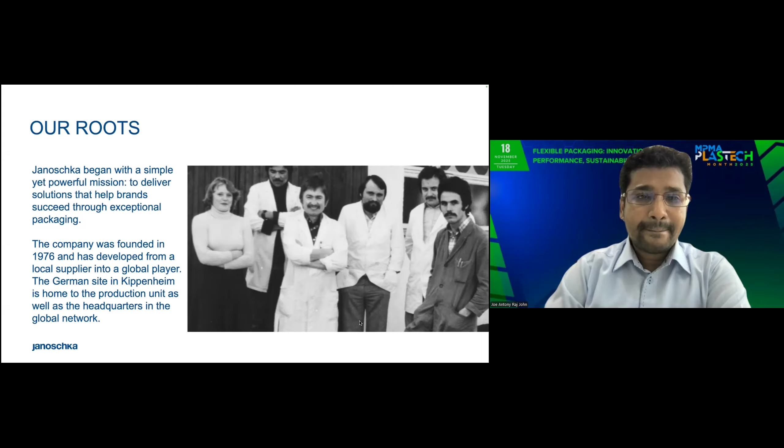We are the global partner of staff over 1,600 globally, with 21 sites in 12 countries. The complete value chain that we cover in Janoschka is from the design adaptation until preparing the cylinders and delivered to printers. So we produce, in the area of rotogravure, about 170K pieces, with embossing rollers of 2000, with a base of 30,000, together with flexo plates of 50,000 square meters.

With the excellence of over 50 years in the industry, with experience and innovations, we widely produce embossing rollers, rotary embossing microblinds, and also customized structure designs. This is also for food and non-food applications, especially in food industries like Maggi cups and butter cups. All these things have a relief printing, which we can produce the embossing rollers for them.

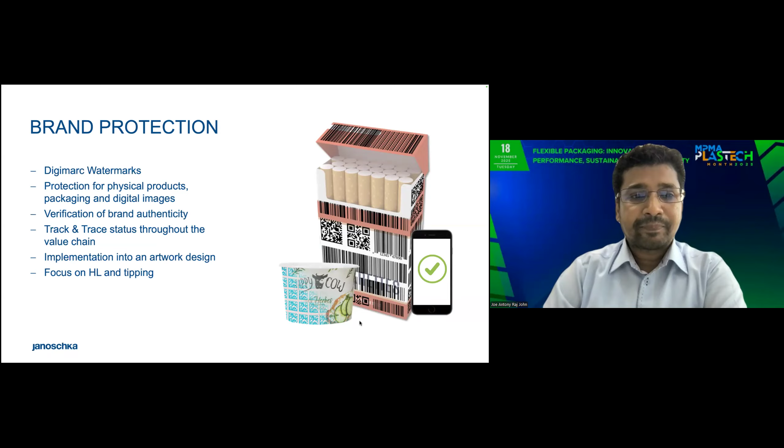For the surface finishing, we have a prismatic varnish coating, which has a dynamic interactive 2D impression, and also has an anti-counterfeiting feature. For brand protection, we have Digimarc watermarks, which can be scanned to know the brand authenticity using these softwares.

So here I'm going to talk about the Asia Pacific structures. Janoschka Malaysia, located in Nilai, is our headquarters for Asia. We also have branches in Vietnam and also in Philippines.

Our organization chart, we are reporting to Mr. Uday Kumar, the Managing Director, Plant Manager Gonzalo, and Willie Low, who's our Sales Director. Our business growth in manpower for 2024, we are about 150 staff with a revenue of 52.9 million Malaysian ringgits.

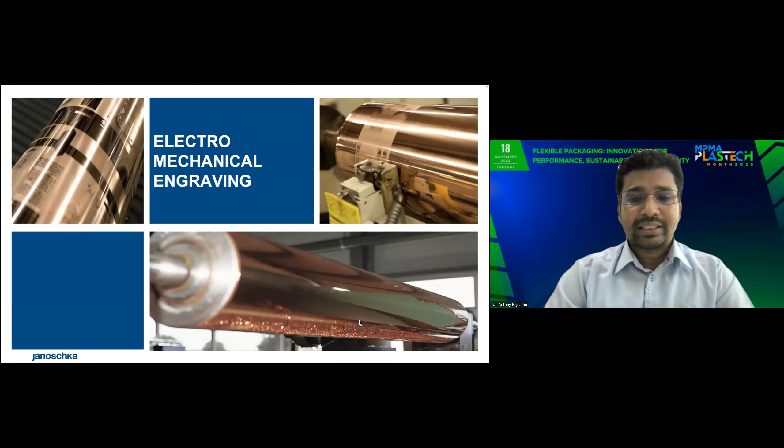So the coming slides will explain the engraving technologies in rotogravure. The first technology we are going to talk about is electromechanical engraving. It's a conventional type of engraving using a diamond stylus, which will have a variable in size and depth.

That's the engraving machine, electromechanical one, with the copper plated cylinder loaded on the machine. Using the engraving head, it will engrave on the cylinder's copper surface. The engraving speed is 8,000 cells per second using this diamond stylus.

As you can see, the variable depth can define the volume of the inks that it's going to carry. 5% tone looks smaller in cell size, whereas 50% cell is moderate size, whereas 100% will have a complete full volume in cell depth.

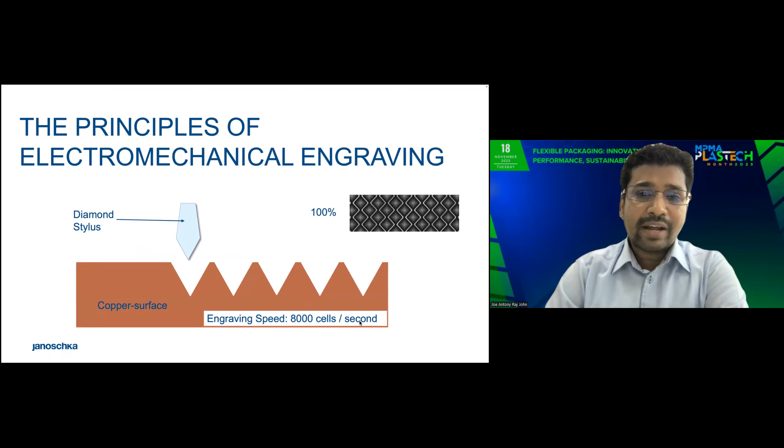Each and every diamond stylus and its angle has its own depths, which we can define by 120, 130, and 140. Most commonly used is the 120 stylus for all packaging in non-food and food industries.

For the cell geometry, as you can see, the cells are where the ink fills, and the cell wall is where the doctor blade holds and removes excess ink from cells, and the channel helps the ink flow smoother to print.

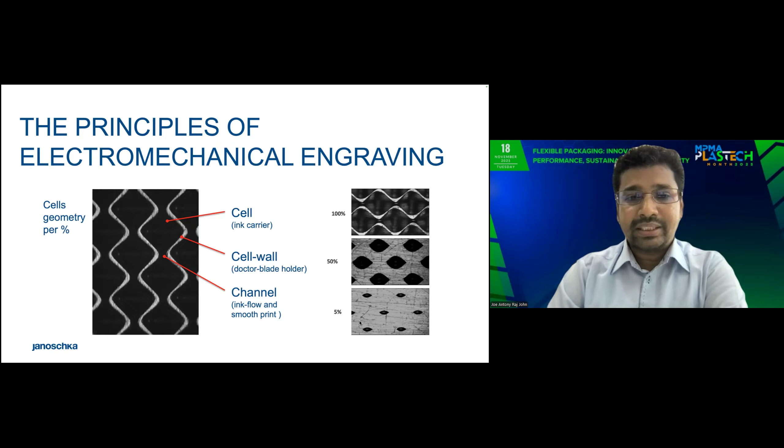As you can see, the 100, 50 and 5% of the cell dimensions look like this, and we have special tools to measure that and ensure these cells are produced repeatedly within the specific measurements and parameters.

There are certain line screens that we follow based on defined and fine screen requirements. The 70 screen is most commonly used, whereas 80 and 100 lines are very fine screens, especially for fine text.

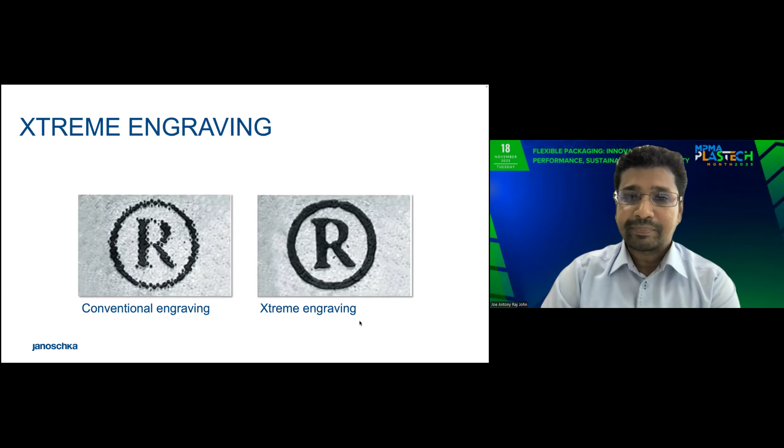Conventional engraving also comes with an additional plugin called Xtreme Engraving Head, which can reproduce very fine text elements. Aside from this, we also have high quality hinting, which can boost positive and negative text from the minimum to the max.

Adding to this, we have volume oriented engraving, which ensures that the volume and cell dimensions follow throughout the cylinders, to ensure perfect process control and to reduce waste during printing and color matching.

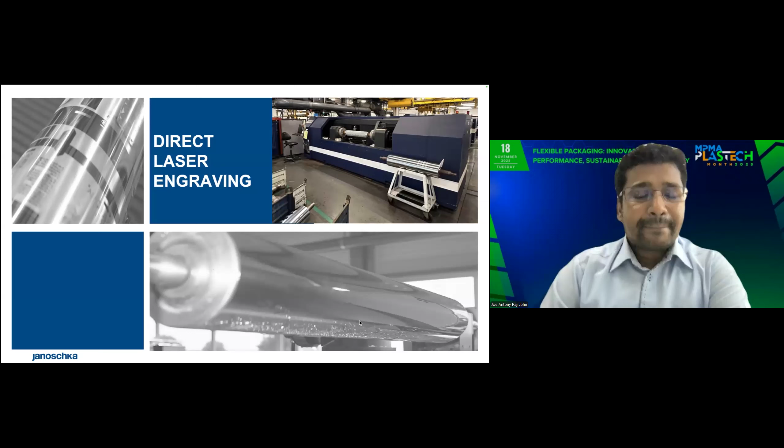The next technology we're talking about is direct laser engraving. This technology brings us variable shape, size, and depth.

As you can see, human hair is 100 microns, whereas our DLS master screen can engrave 35 microns, with a direct laser of 10 microns. With the exposition of ThinkLab, it can go down to 2 microns also.

So eventually the laser exposes on the zinc surface or copper surface, which engraves 70,000 cells per second, producing various shapes, depths, and sizes.

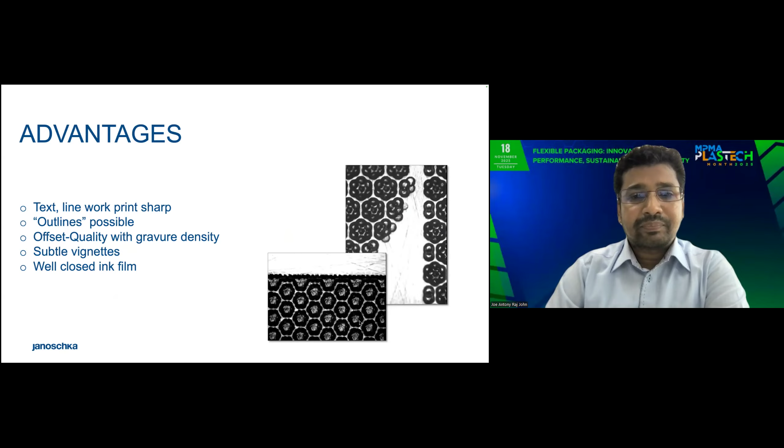There are various screens available by master screens and also single shot. This helps us achieve sharp outlines with offset quality combined with gravure densities, subtle vignettes, well closed ink films, variable cell geometry, variable depth, and extra large cell volumes. It's all possible with direct laser technology.

The last technology we talk about is laser etching. It's variable only in size.

This laser etching technology has special screens, outlines, and high resolution, especially for secure printing, text, logos, and sharpness. Manual cut and hand screen are still possible.

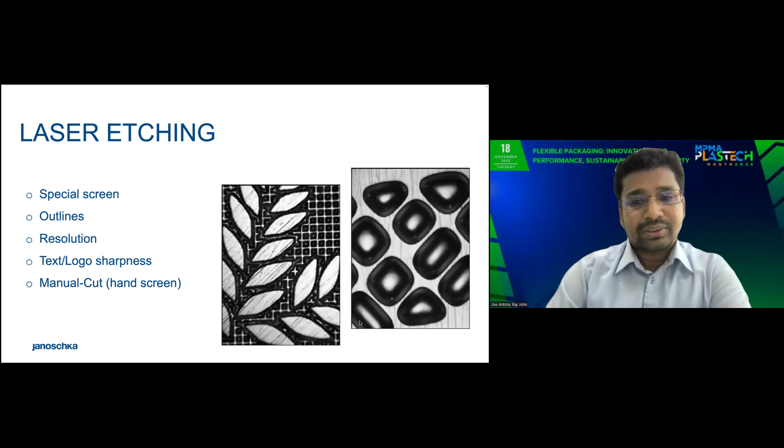So ideally this is for tipping papers and maximum 1 or 2 colors, especially for line work and fine logos and text for secure printing purposes.

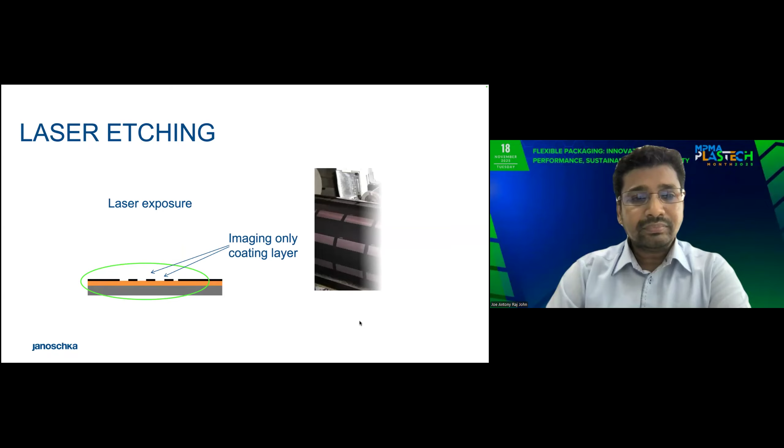The laser etching has its coating on top of the copper. The laser gets exposed on top of the coating. That's how the coating looks like. Then the chemical agents remove the exposed area and penetrate to the copper.

And to remove the etching resist. So that's how the cells look at the end, the final product of laser etching after the chemicals are done.

So the copper surface, all these 3 technologies require chrome finishing. This chrome finishing layer is up to 7 to 8 microns, but in industry we also do 12 to 14 microns as well. This is to protect the cell engraving, and also for resistance to the doctor blade and the ink substrates.

Dechrome, rechrome is still possible if you run certain meters; if the cell is in good condition, we can do dechrome, rechrome. Surface roughness varies depending on the substrate used.

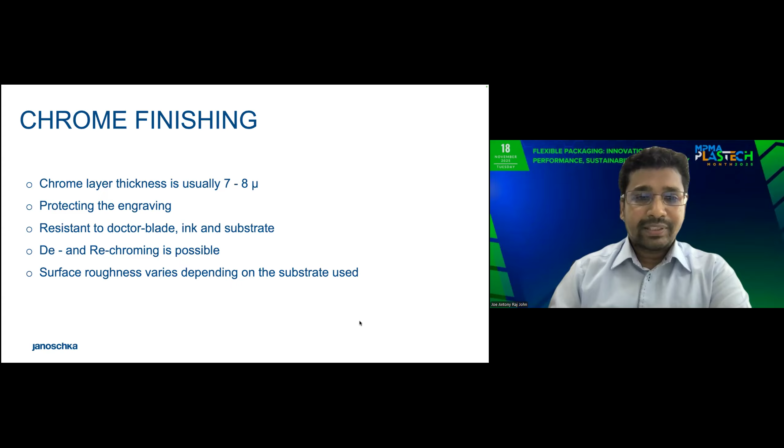To summarize, the choice of engraving technology depends on how complex the image or the artwork is. This is defined from the artworks we analyze. If there is fine text involved in the artwork, we allocate the technology to laser etching. If there are fine tones, fine vignettes involved, we allocate to direct laser or conventional engraving.

Customized surface roughness for various substrates available in the industry is also possible. And web compensation can be applied during the cylinder production itself. We do the final quality control to ensure that the cylinder engraving, the surface parameters and all the relevant information meet customers' requirements.

So this is all about Janoschka and what we do in various technologies. If you have any questions, please feel free to ask me. Thank you.

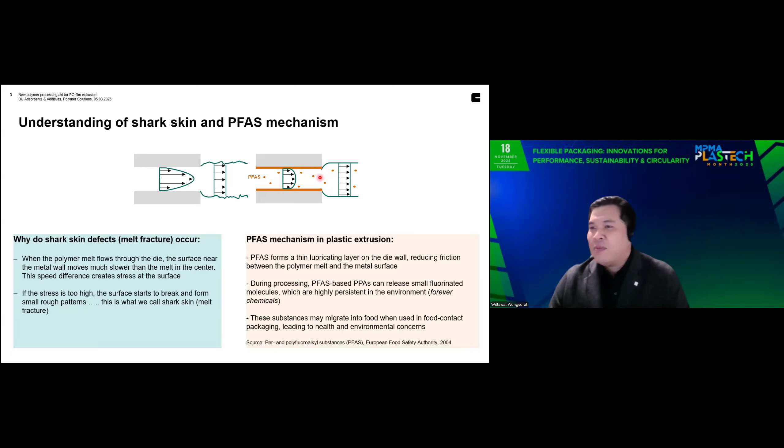However, we also know that PFAS substances can have a chance to contaminate the food, the film. And if the film has to contact the food, it can possibly migrate to the food. And if we consume the food, there is also the risk of PFAS contamination in our body. So more and more regulatory bodies push more restrictions on using PFAS in food contact packaging.

You can see here, I summarize some key regulatory points. In December last year, the European Chemicals Agency announced that they are under review to restrict the use of PFAS in food contact packaging. In the US, 13 states have already banned PFAS in food contact packaging. And in November last year, they announced that there are 15 states going to consider banning PFAS soon.

From the European side, in the regulation on packaging and packaging waste, you can see here they already announced that they will start to limit the PFAS allowed to be detected in food contact film to only 50 ppm, and it will start August next year. So from the regulatory point of view, there is more and more concern about using PFAS in food contact packaging.

And moreover, we also know that 3M, a major producer of PFAS in the market, already announced that at the end of this year they will exit the market. The reason is that they found PFAS contamination in the blood of people living near the factory.

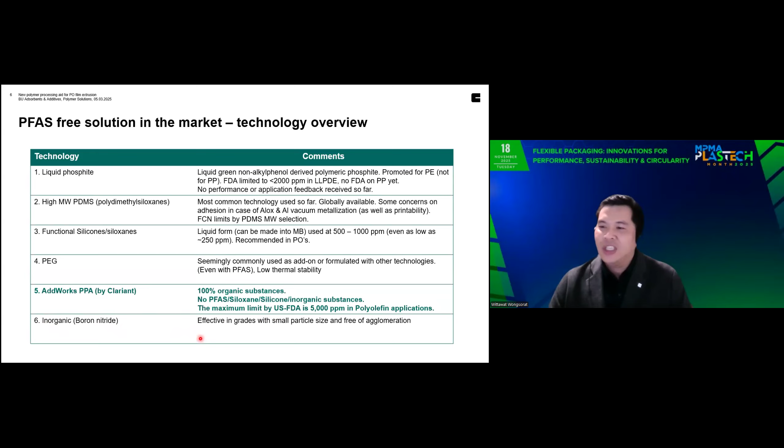So from the challenges that we have, we take the challenge from the regulatory point of view to develop a product which is safe for humans and the environment. For the processor or converter side, we also take the challenge that line production efficiency has to stay the same, with no drop in efficiency. The end customer should get the same quality of film performance compared to the PFAS polymer processing aid.

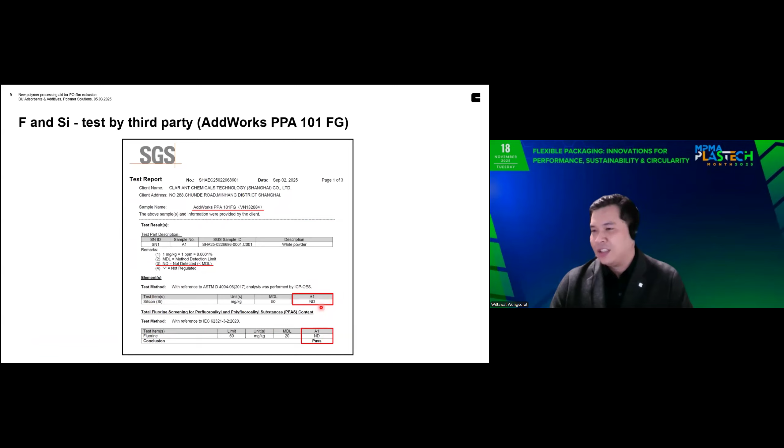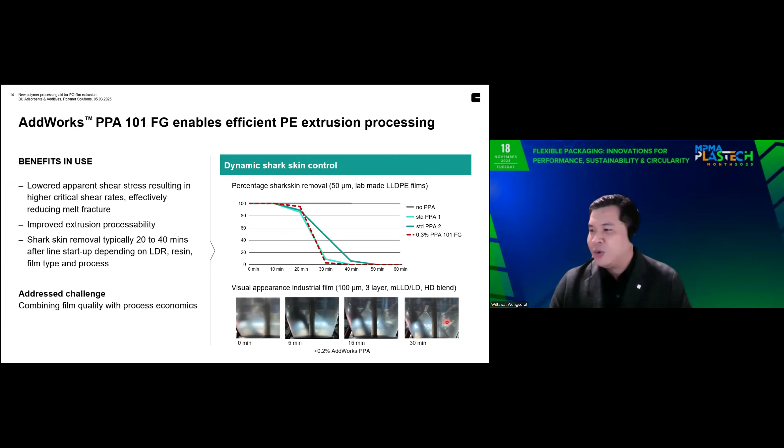In terms of the die build-up, you can see here we conducted the die build-up test using the metallocene LLDPE resin. After we run from 1 hour until 6 hours, the die build-up is there. You can see the black substance at the die. When we compare with the standard PFAS at 500 ppm, you can see the improvement in terms of the die build-up.

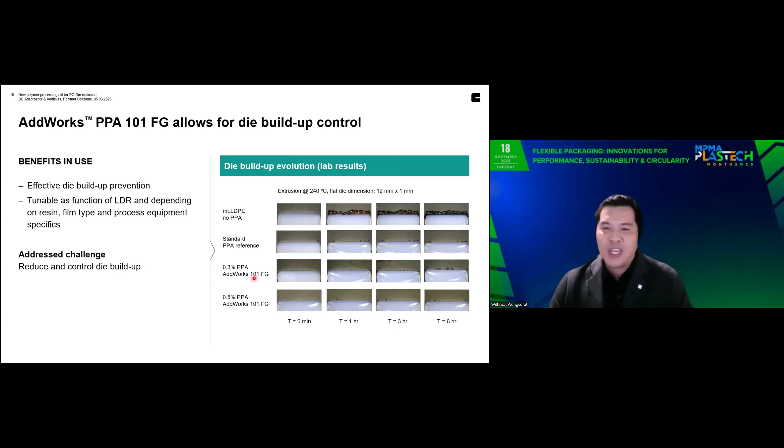Like I mentioned in the beginning, if you would like to get the same performance as 500 ppm of the PFAS PPA, you have to start with 3000 ppm of our products. You can see here the performance looks similar. But if you would like to get better performance compared to the PFAS, you can add 5000 ppm and you will get better performance. You can notice that we use more dosage compared to the PFAS. But when you calculate the cost per use, it will be similar or the same compared to the PFAS solution.

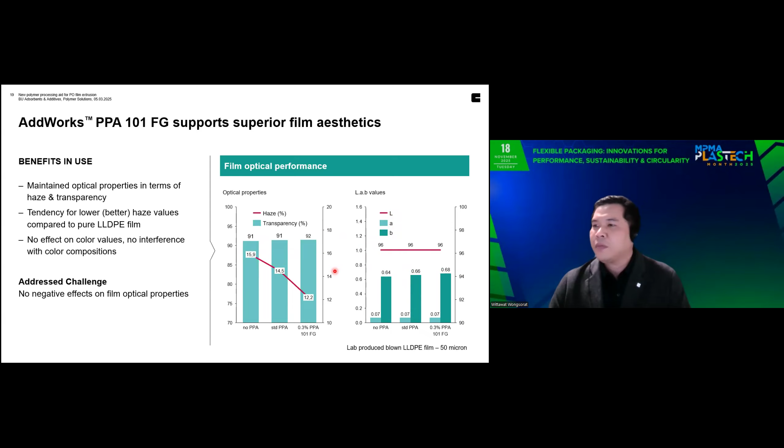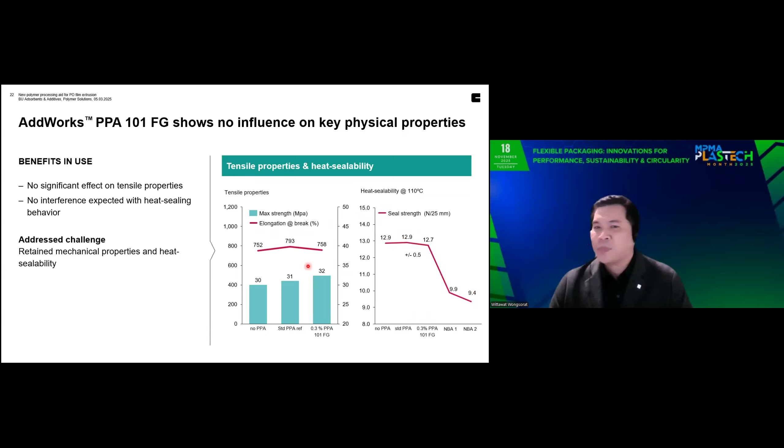In terms of the regulation, like I mentioned, we already have full support of the food contact regulation for Europe, US, Mercosur, China GB, and Japan positive list. Okay, so all of the challenges here we have already solved.

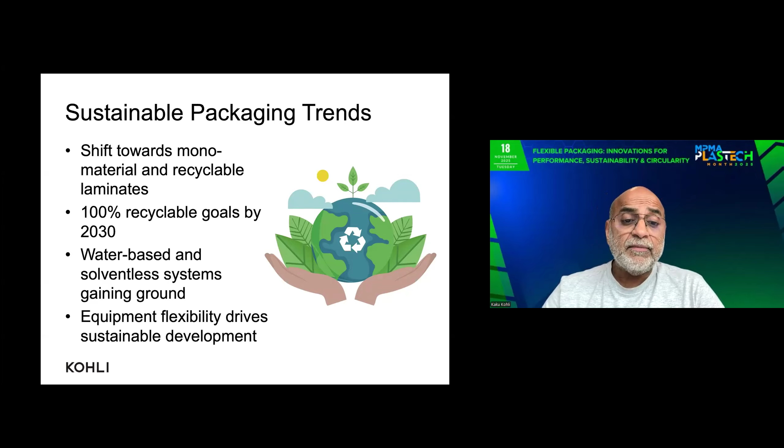The packaging paradigm shift represents a drive towards a circular economy. I'm not sure about Malaysia, but everywhere I've seen in Europe, there is legislative pressure from governments for global bans on single-use plastics, and of course extended producer responsibility. I'll ask you all later whether you have this pressure from the Malaysian government. The new generation is growing their preferences towards sustainable and more recyclable brands, and brand owners and corporates are pledging towards using 100% reusable, recyclable, or compostable packaging. The result is an urgent need for high-performance, recyclable, flexible packaging.

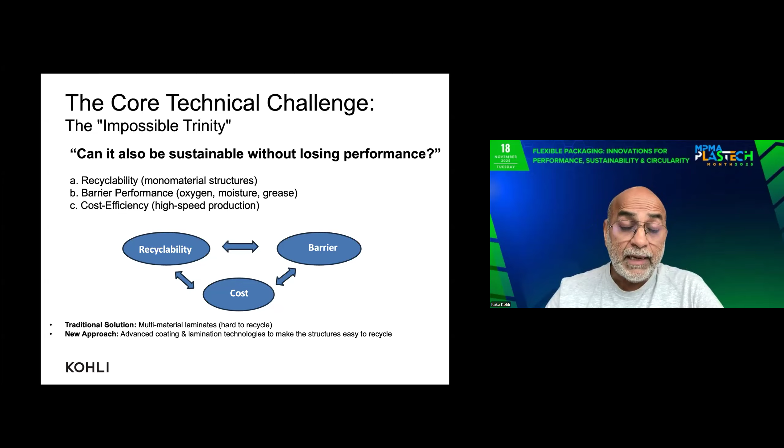The core technical challenge, or the impossible trinity: can packaging be sustainable without losing performance? As you see the three circles, the one on the left, recyclability, is basically using monomaterial structures which are recyclable. But such structures have to have proper barrier performance against oxygen, moisture, grease, and more, and at the same time be cost efficient for high speed production. The traditional solution is easy - a multi-material laminate, which is difficult to recycle. The new approach is to use advanced coating and lamination technologies to make structures easy to recycle.

The core economical challenge for the impossible trinity: first, building productivity and values for such sustainable material. At the same time, you have to be sure you're lowering energy and carbon emissions. And most important of all, to the converter, the brand owner, the purchaser, is how to lower the operating cost.

Let's look at some challenges in recyclable structures. Traditional structures are normally polyester with polyethylene, PET with PE, or a polyester-aluminum foil-polyethylene structure. Now everyone is trying to replace it with a PE-PE structure or a PP-PP structure. But they have to be careful, because it has to maintain all the barrier qualities, sealability properties, optics, and machinability. So we have to adapt to new adhesives and coatings available in the market today, and the most important thing again is to lower the carbon footprint during conversion. Such recyclable or sustainable materials have to have oxygen barrier, fragrance barrier, heat resistance, productivity, and recyclability.

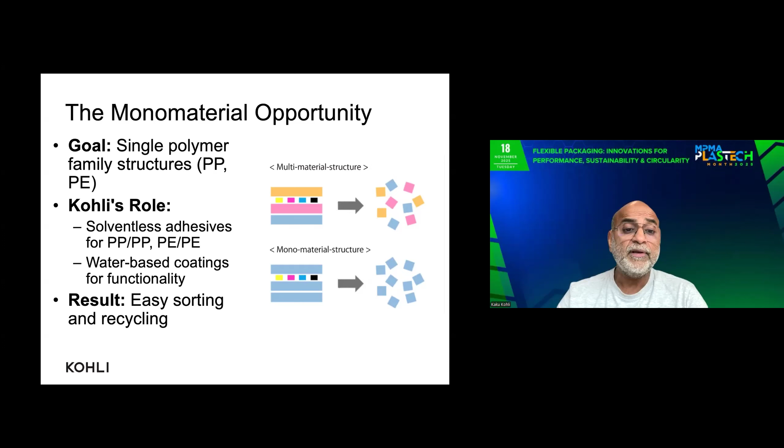As we all know, the functions of lamination and coating are to increase the mechanical strength and barrier property of a pouch. At the same time, we have to make sure its sealability properties and product protection are very good, and it has to stand out on the shelf in a supermarket. So aesthetic enhancement and print finishing are the most important criteria.

Transition to sustainable substrates: we are shifting from composites to monomaterials, where today paper and fiber-based packaging is reviving in a big way. We are looking at solvent-less applications or water-based systems, which are replacing the traditional solvent applications and solvent methods.

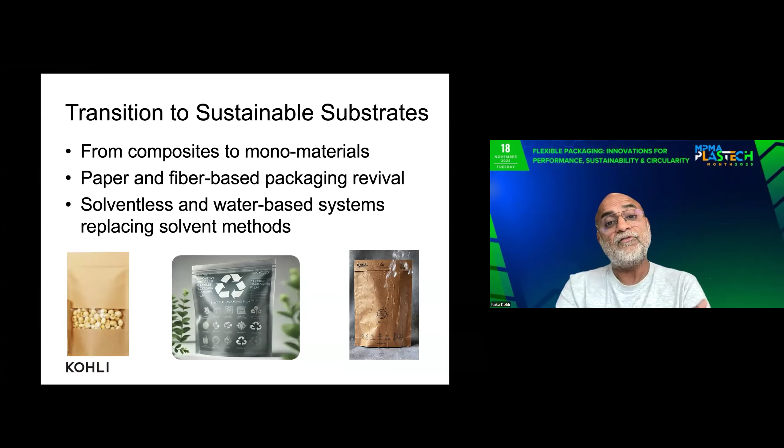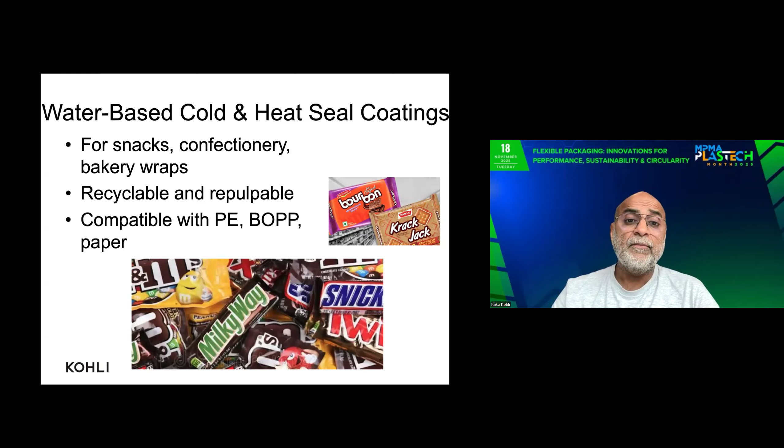Water-based cold and heat seal coatings are gaining ground for the snack food industry, confectionery, and bakery wrappers. The advantage is that the cold or heat seal lacquer here is also water-based, so it's easily recyclable, and if it's a paper-based pouch, it's repulpable. Water-based cold or heat seal is also compatible with PE or BOPP film.

As we all know, metallized film is difficult to recycle. So basically, cast and cure technology is used for decorative and functional surface finish, and of course to increase the value of a product and stand out on shelves.

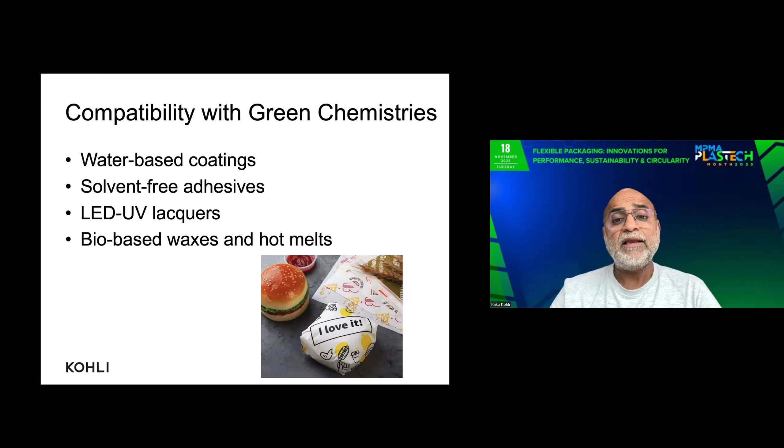Compatibility with green chemistry: we are looking at water-based coatings, solvent-free adhesives and lacquers, LED UV lacquers, and bio-based waxes and hot melts, which, if you see down here, all the burgers are wrapped in a piece of paper.

Compatibility with eco-friendly materials, and what we have to be very careful about is that because the runs are becoming shorter, such equipment have to have quick changeovers, and at the same time it should support sustainability. As you shift to water-based from solvent-based, we're talking of higher temperatures and longer drying tunnel lengths, so the equipment should be designed for energy saving, for reducing the power load.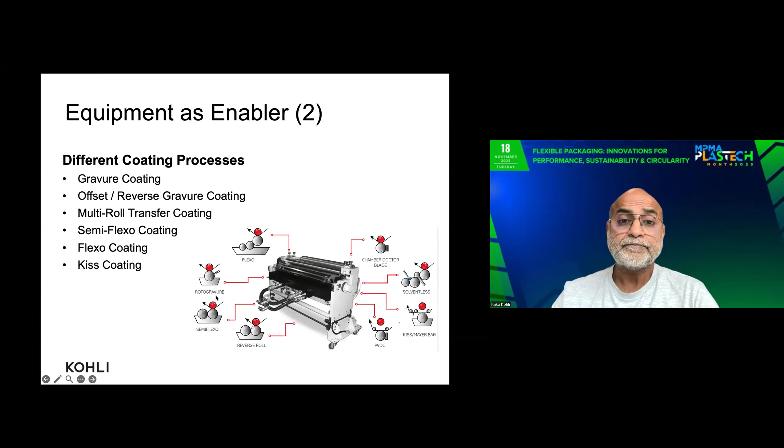What Kohli provides as lamination and coating machines is here: solvent or water-based dry laminator, water-based wet laminator, which is used for paper and aluminum foil lamination, and solvent-less laminator. We also produce a combi laminator, or multi-process laminator, where you can combine dry lamination, wet lamination, and solventless lamination into one machine. So you can choose depending on the structure that you have to make.

And in the same machine, you can also apply water-based cold seal. Then we offer extrusion coating and lamination machines, triplex lamination if somebody wants to have 3 substrates laminated together in one pass, wax and hot melt systems, and the multi-process coating and lamination machine.

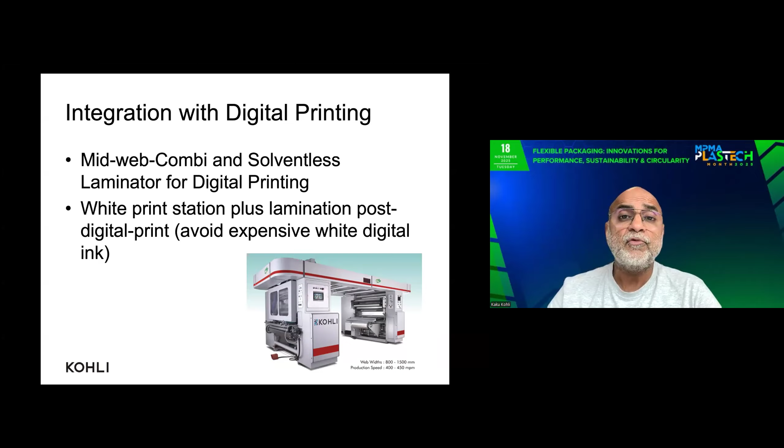As we all have been seeing, digital printing is gaining ground worldwide, so we need a kind of sustainable coating and laminating machine to take care of digitally printed films. Kohli offers a mid-web combi or solventless laminator for such digitally printed film, and we also offer a single station gravure printer to print white, because the most expensive ink in digital printing is white. So as I said earlier, you're trying to be sustainable, but at the same time you have to make sure the cost of production is the lowest.

Extrusion and solventless hybrid lamination: in India, the snack food industry is moving towards a 4-layer structure, so the first 3 layers are laminated using an extrusion laminator, and the sealant area uses a solventless laminator. This is very big in India, especially for chips from Lay's, from PepsiCo. It basically combines extrusion coating and solventless lamination application, enabling you to produce a multi-layer recyclable film, and it enhances bond strength without any secondary curing time. So your productivity can increase because there is no curing required if you are using an extrusion laminator.

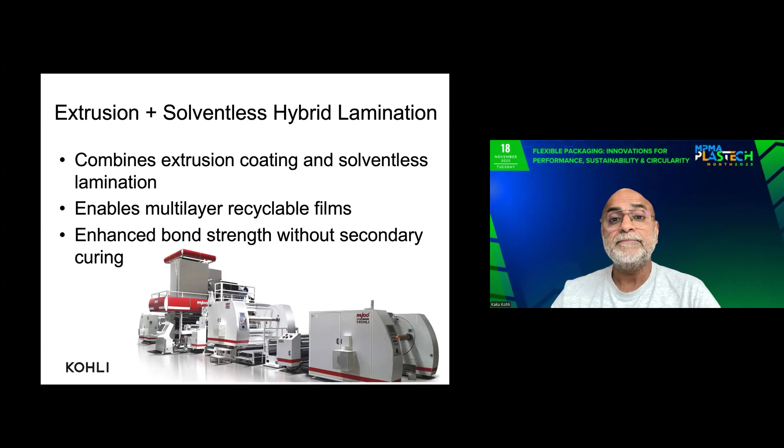The machine can be slightly changed so that these two machines can be used separately and independently as required, and it can also be used in tandem to make a laminate of 3 layers in one pass. You can produce barrier film, paper, sealing structures all in one pass.

Wax and hot melt lamination, we are looking at compostable and bio-based packaging, renewable waxes with low temperature bonding, and such machines have high speed production with low environmental impact.

Wax coating is very popular if you look at chewing gum wrappers produced in the world today, butter wrappers, cheese wrappers, and as I had shown earlier, the wrappers used by all the burger chains in the world.

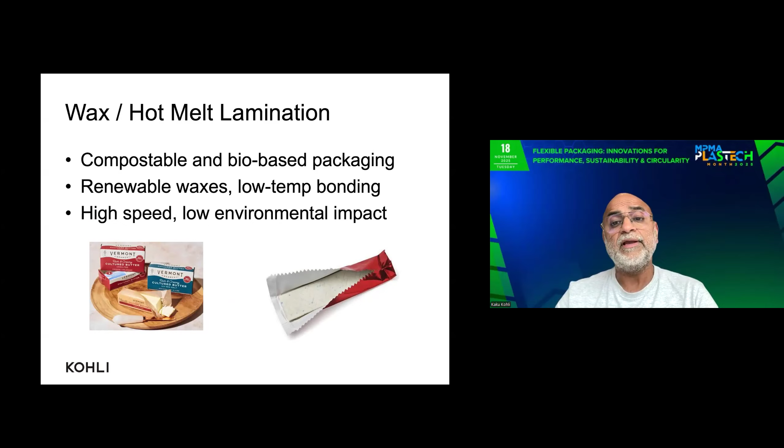The most important point to look at in such equipment is how efficient it is when consuming energy. When you shift to water from solvent, you're looking at high temperatures, more heat loads, and a longer drying tunnel length. So the equipment has to be innovative with a very good drying and exhaust design.

It should have a precise and well-designed air recirculation system, sometimes with LEL control if solvent is involved, where you can reduce your energy consumption by over 60 to 70%.

Safety cannot be ignored anywhere in the world. The equipment has to be CE conformity, explosion-proof design. Static is a very big challenge today because as the films are getting thinner, production speeds are becoming faster.

This is a big challenge in a lot of machines, so the equipment has to be ready for anti-static elimination.

And we at Kohli believe very strongly that just eliminating static is not enough, because over time, 1 to 1.5 years, the static eliminating bars accumulate dust and the power reduces, which you may not be aware of.

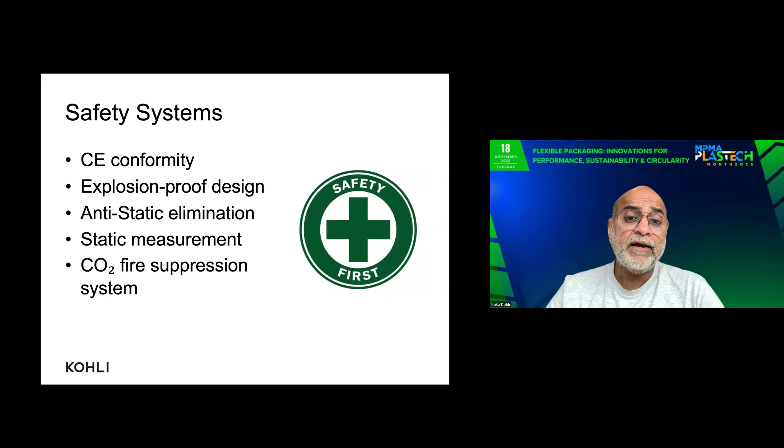And of course, all equipment should be equipped with CO2 fire suppression systems.

Precision web handling is very important as films are getting thinner and you're using paper. The machine should be able to operate at high production speeds with very low tension control.

High productivity is the biggest challenge when we talk of sustainability and producing water-based lacquers while reducing energy consumption. So we are looking at high speed even for barrier coatings, which are water-based with low solid content.

Quick job changeovers is very important because today the runs are getting shorter and shorter as the SKUs are increasing by all brand owners. Your equipment has to have the lowest waste setup.

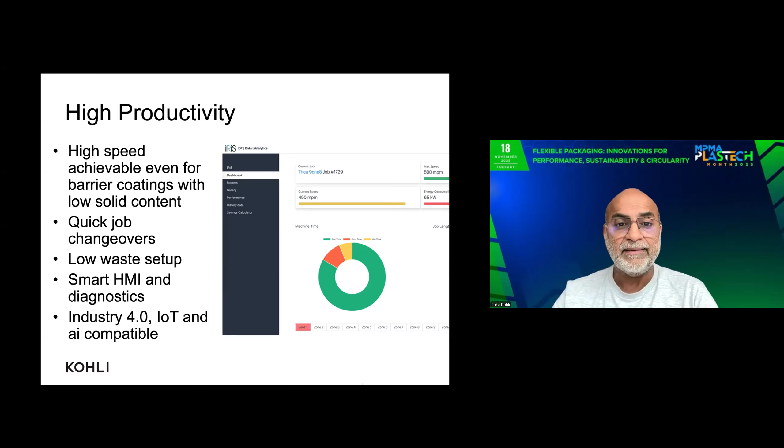Case study here, we are trying to substitute polyester polyethylene material with PE material. So basically, we are producing a material which has to have a similar barrier strength and similar performance.

The advantage was to create an all polyethylene PE structure, which is compatible today with widely available recycling streams in the world. It maintains critical barrier properties against moisture, grease, and aromas. It eliminates the need for non-recyclable polyester material, and it's easily printable, sealable, and 100% recyclable.

The other case study was for producing a PP laminate structure, again eliminating the polyester which was used for stiffness and clarity.

So here we use the water-based barrier coating on the BOPP film to enhance its barrier property. And the result was an OPP, water-based coating, solventless adhesive, and a CPP structure. The advantage, again, was an all-PP structure compatible with a growing PP recycling infrastructure. It preserved the high gloss, high clarity aesthetics desired by brands, and it provided a robust high barrier solution for snack food, confectionery, and more products.

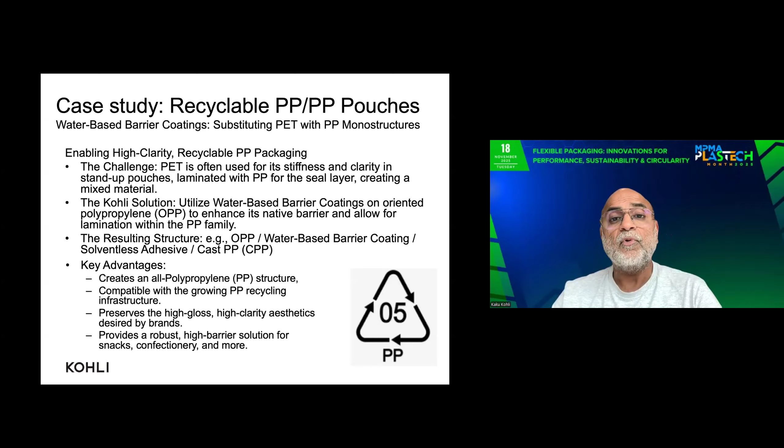On Kohli's sustainability roadmap, we are spending a lot of time, effort, and of course money on R&D for better water-based barrier coating applications, which are having energy optimized systems. We are producing modular hybrid platforms, and we are collaborating today with many brand owners and barrier coating lacquer manufacturers.

So a quick summary and key takeaway: Kohli enables high-performance sustainable substrates and laminates. Efficiency, safety, flexibility, and energy savings are the prime criteria for all Kohli's equipment. And we are producing ready for the future of recyclable packaging.

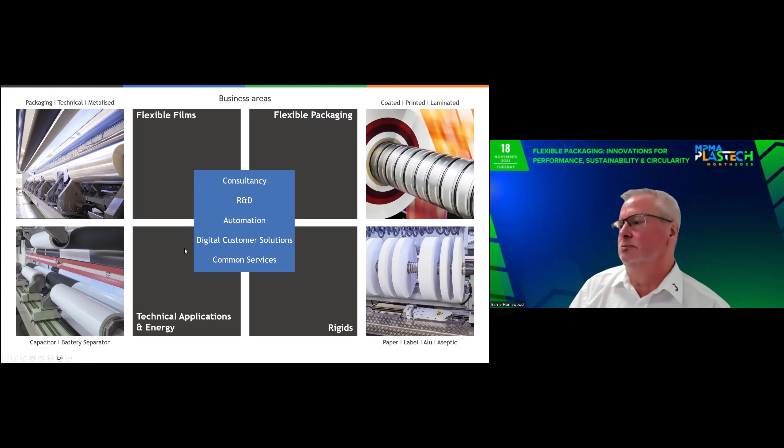Looking at the flexible packaging platform, we've got 3 areas with the shafted machines and 1 station machine. Here is our SilverLine platform, recently launched at the K Show. It's a very modular design: we can have integrated or separate unwinds, duplex rewinding or turret rewinding. It's very versatile and built in modules, so we can pre-configure the machine, and once you finalize the specification, we assemble it very quickly. Our target is to deliver within 4 months. Rewind diameters are 610 millimeters, common in flexible packaging, and web widths 1.4, 1.7 meters. Speeds up to 700 meters per minute.

The next platform is our BlueLine platform. The main differences from SilverLine: web widths go from 1 meter up to 2 meters. The rewind diameters are bigger, up to 850 millimeters, or even 1,000 millimeters on a specialized shafted machine. Speeds are up to 800 meters per minute, and levels of automation can also be increased.

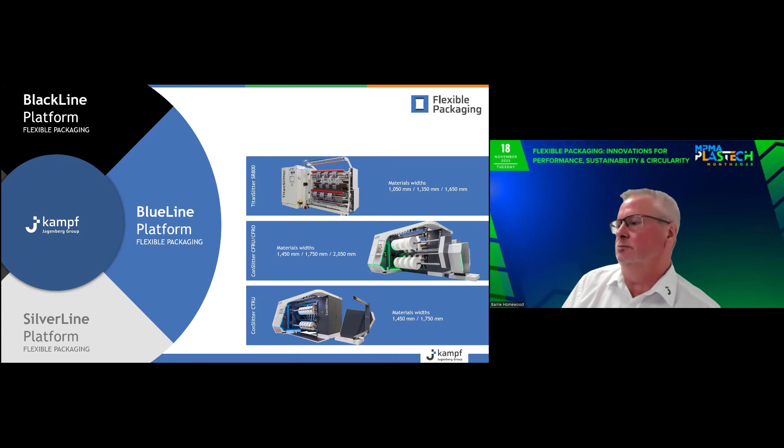And then the BlackLine platform is our fully automatic slitters, where we incorporate the most automation. These machines can have web widths up to 2.2 meters, rewind diameters up to 850 millimeters, and speeds up to 1,000 meters per minute. Typical applications are snack food production, water bottle labels, areas in flexible packaging where you have high volumes and need a high throughput.

And then finally, for flexible packaging, for those converters that need very large rewind diameters or heavy weights, we have our station type slitters. Now, these slitters don't use a rewind shaft, they use individual stations. And we can have widths up to 4 meters, rewind diameters up to 1.2 meters, and speeds are up to about 1,200 meters per minute. So these are really for producing large rolls.

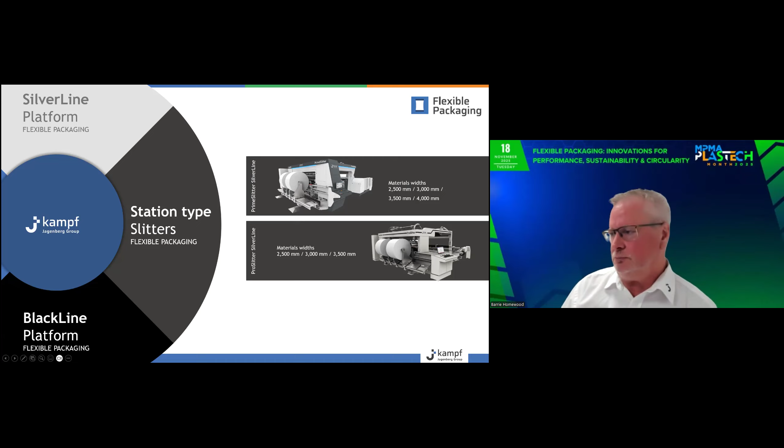Also combining with slitting and rewinding, or when we have high productivity, we need to look at how we're going to handle the rolls after slitting. So we have very different developments from semi-automatic to fully automatic systems, whereby we can take the reels off of the slitter rewinder automatically. We can weigh the roll, we can label the roll inside the core and outside. Then we can wrap it or bag the roll, and then we can automatically palletize it.

And we can have different stages in between all of those. So this is really important when we start to talk about high productivity machines. We can combine it with a total turnkey solution for your packaging needs.

And of course, with all our machinery, we have to support it for after-sales service. I think we have currently around 85 field service technicians based around the world. So we can service you directly for spare parts. We have a digital solution for our machines, as we talked earlier. So we have high connectivity and production monitoring, all of these things that you would expect from today's machinery. But the main thing is we can support you wherever you are in the world with local engineering.

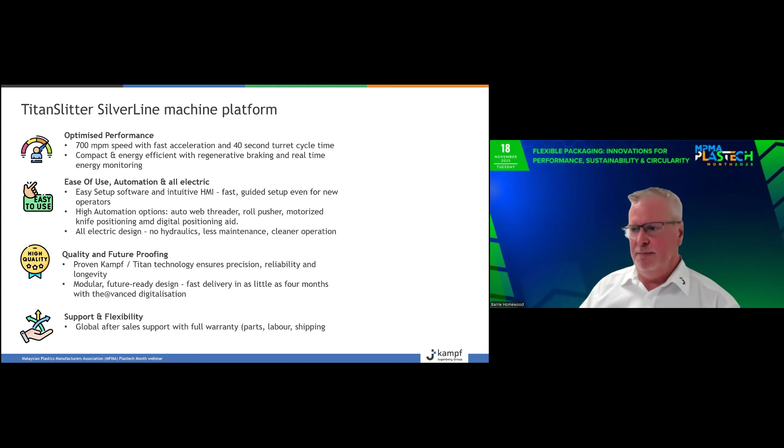And as I mentioned before, we have a global after-sales service. Our warranty is very strong. We offer the parts. If you need the part fitted, we'll include the labor and, of course, the shipping on warranty parts. And I think that's important, that what you're buying into, what we offer, is a complete package. It's not just a machine.

So you're basically winding on one set of shafts and you're preparing the cores on the second set of shafts. So then when you come to change over, it's an automatic sequence. So that's the difference between a duplex and a turret, 2 shafts or 4 shafts.

So what we decided some years ago was that we really needed to develop some software that would give us the capability of giving you a production estimate through our machines. And we worked with Cambridge University to come up with a software package that we've developed continuously since.

And really what we can do with this software now is if you share some production details with us about material types, so the thickness of the material, the rewind lengths, the cores, all this sort of basic information, we can make some very accurate reports on productivity that we would expect from our machine. And then we can also compare it with other models in our portfolio, or we could compare it with your existing machine to see what the increase of productivity may be.

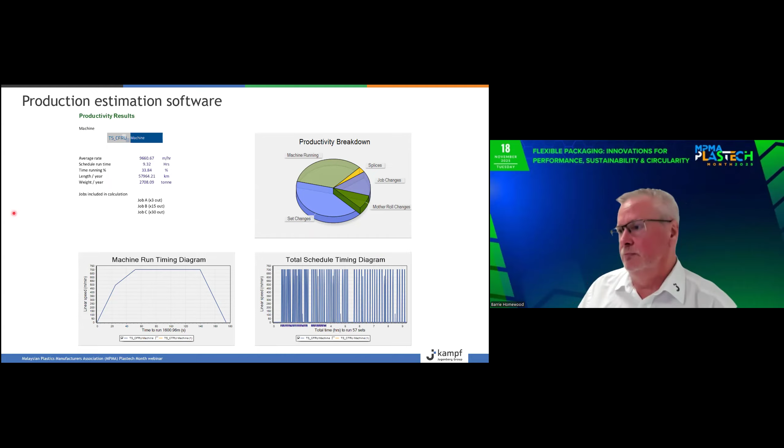Web width is 1200, unwind core is 6-inch, rewind core is on a 3-inch, and the job size, the rewind lengths that we've calculated with, is the same. So this is 30,000 meters on the job size. Everything is comparable. The only difference is the number of outs and the slit widths. So that's the data that we've used to make these comparisons.

So if we look at the first job, here we have the 3 out, and on this side you can see the duplex rewind and then the turret rewind. So here the data coming out for the 3 slits is an average run rate of 14,000 meters per hour, and on the turret machine it's almost 16,000 meters per hour.

This is the run time for that job. So remember, we said we're going to run 30,000 linear meters. So this is saying that on the duplex, it will take roughly 2 hours. And then on the turret machine, it's less than 2 hours. The running time of the machine, 50% and 58%. And then this is just a calculation: if you were to run that job for a period of time, say a year, what the net output would be. But here you can see the productivity breakdown in these pie charts.

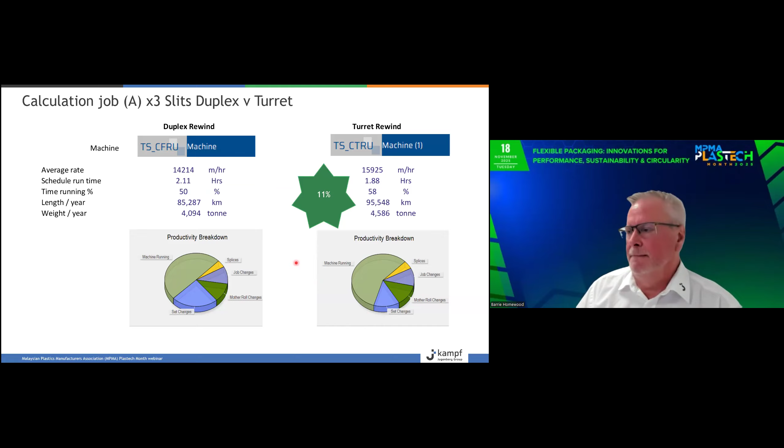If we move on, considering the 15 out, same calculation, same material. Here you can see, again, the average rate is 10,000 linear meters. And then on the turret, it's almost 12,500. And obviously the running time is increased here because we're saving more time and the output's more.

So with a 15 slit reel, the duplex compared to the turret, we're getting more than 20% increase in productivity for that same job. And again, you can see here with the productivity breakdown, the machine running is much less on the duplex compared to the turret machine.

Then if we go to the final comparison, which was the 30 out, here you can see it's a completely different scenario. We're getting much less material per hour out because of all the job changes or the set changes. It's taking a lot longer. But again, the difference between the turret rewinding and the duplex rewinding, we're getting more than 25% increase in productivity with a turret machine.

And remember, this is the same materials. It's the same rewind lengths. The rewind lengths are around 300 diameter roll. So it's a typical sort of flexible packaging roll. But again, we're getting a much higher increase on the turret machine.

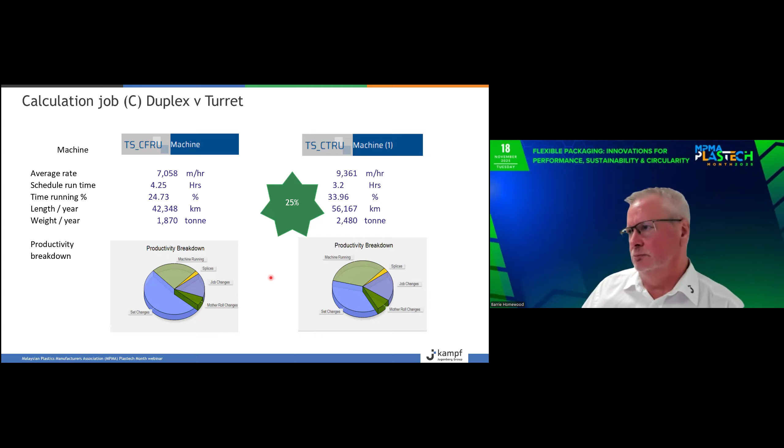And then if we were to bring all those 3 jobs together, so the job with the 3 out, the job with the 15 out, and the job with the 30 out, and compare that production mix with 3 jobs, we're still getting a 20% overall increase in productivity from the turret application.

So really the conclusions are, yes, turret rewinding can give you a higher productivity, higher output. What this is really showing is it depends on your product mix. If you go back to the 3 out, we were only getting 10% increase, whereas with a 15 or 30 out, it was 20 or 25% increase. So if you're doing lots of narrow slit widths, then this becomes interesting to consider a turret rewinding machine.

So the overlapping functions of the turret machine is really where we make the saving. If you can imagine a slitter rewinder with 30 reels on it on a duplex machine, the operator has to cut the web, he has to tape down each individual roll, and then he has to remove all those rolls, and then he has to put the cores all back on manually, and then he has to tape the tails onto the core and restart the machine.

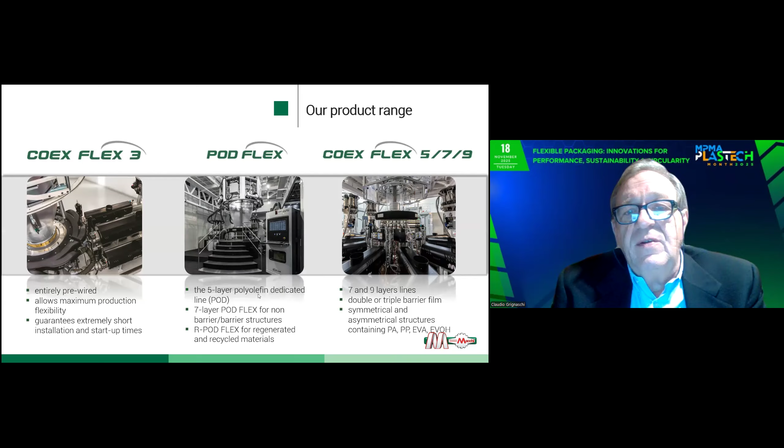As I said, we are producing only blown film extrusion lines from monolayer for specific applications, 3-layer, 5-layer, barrier lines, film for agricultural applications, a range of winders, and the RecoTrim, our trim recycling unit.

Nowadays, we feel that one of the most important challenges we are facing is to develop, to face the challenge of improving the circularity of the industry, that is to say, the recyclability.

So flexible packaging nowadays must be designed for recycling from the beginning. They have to provide material replacement exactly to be able to be recycled more easily, have to be down-gauged to save energy, materials, and reduce the carbon footprint, and ensure a waste reduction.

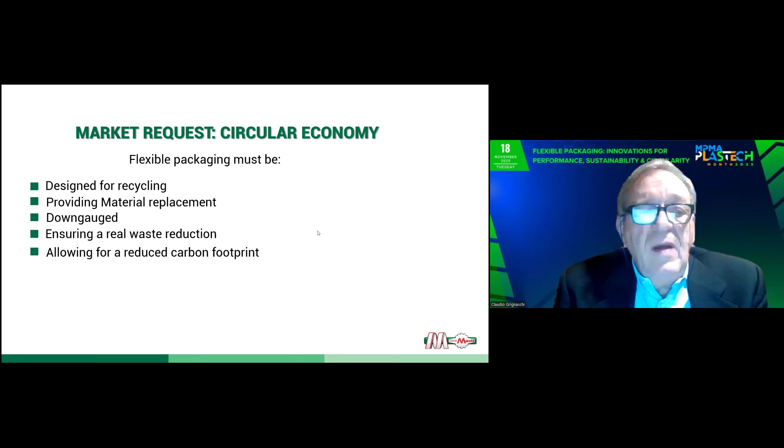Actually, there is a European initiative, the CEFLEX, Circular Economy for Flexible Packaging, who have dictated the rules for developing a circular economy in flexible packaging. Those rules are the collection, sorting and recycling, redesigning multi-material flexible packaging to monomaterials, identify a solution to sort and recycle, and develop the end markets for recycled flexible packaging markets.

What a blown film machinery manufacturer can do is try to develop more materials and try to develop as much as possible a market for recycled flexible packaging material. That is to say, to develop a technology that allows you to reprocess recycled packaging material.

Talking about monomaterial, the classical definition is that a packaging film to be identified as monomaterial must have a maximum percentage of different resins not higher than 5%, up to 10% total. This, of course, phases out most co-extruded barrier films, whose use is quickly growing, as they are non-recyclable because the barrier layer is usually 6, 8, 10% of the overall structure.

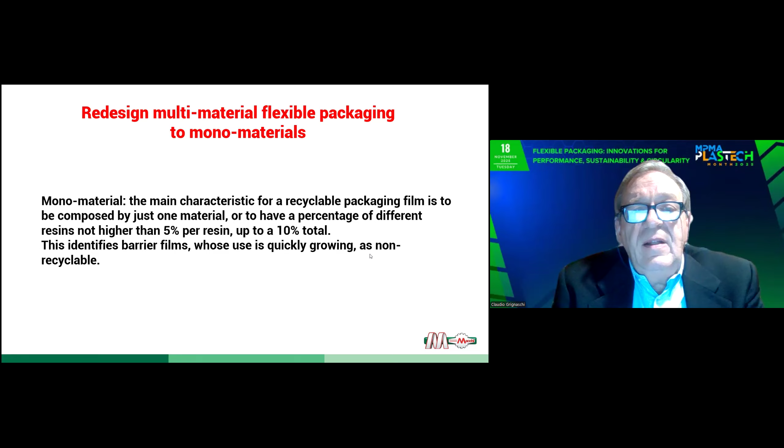What we have done is introduce a solution to allow the production and the use of a maximum 5% EVOH layer for medium to high barrier.

During K25, we presented our new 7-layer line developed for barrier film in symmetric or asymmetric structure for the production of lamination barrier films using high clarity EVOH, with EVOH lower or equal to 5% of the total. At the same time, the line can produce 7-layer polyethylene structures for flexible packaging.

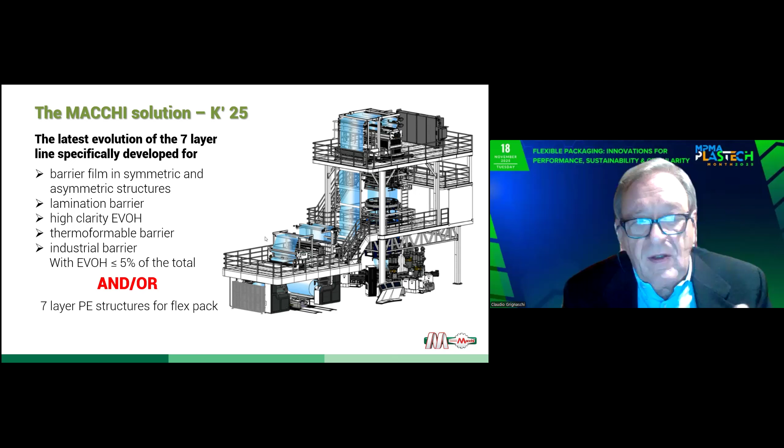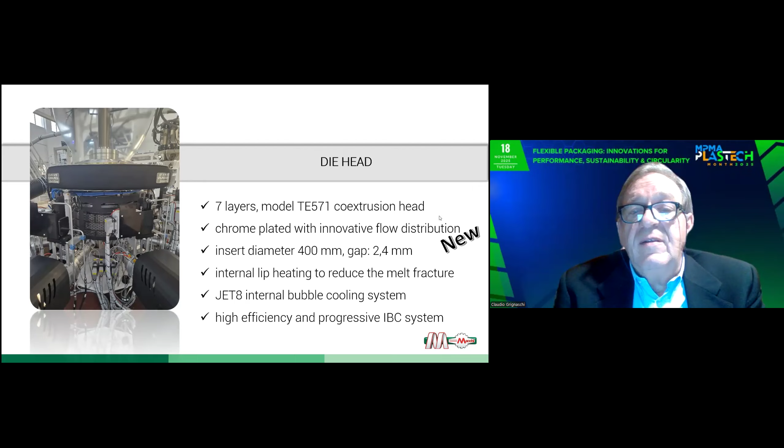New redesigned die head with innovative flow distribution. The line, of course, at the show was equipped with all the bells and whistles.

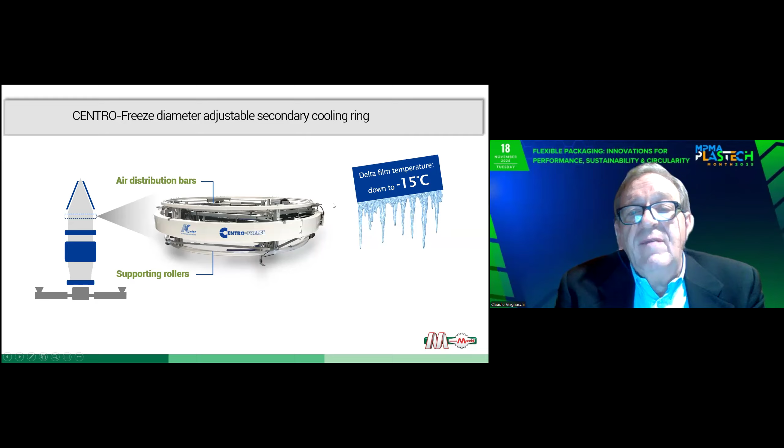So it was including the K-Design Frostline scanner. It was including the new Carat K3.3.2 power flow air ring with integrated wax suction device. The Centrofreeze secondary cooling unit, able to decrease the film temperature by up to 15 degrees centigrade to avoid any possible blocking, even with low towers.

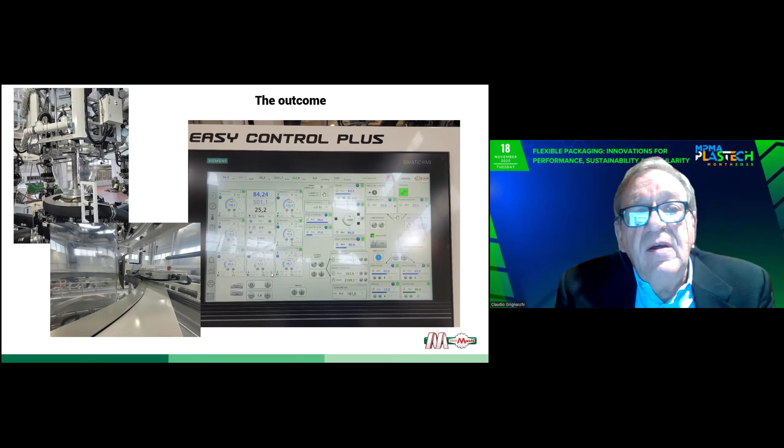You should be able to see here that we were really running a 1 micron thick layer of EVOH. And we sent the film to Mitsubishi Chemical labs in Germany for film analysis, and this was the result. As you can see, film thickness distribution on a 25 micron total structure, we were constantly running up to a maximum of 1 micron of EVOH.

This was the measurement of the OTR, given the average EVOH thickness. So a line able to guarantee you the oxygen transmission rate that you desire at a very low thickness.

What is important is not so much the 1 micron. The 1 micron shows the precision, the legendary quality of the mechanical processing of Macchi. All the die heads are designed and manufactured in Macchi on our own tooling machines.

But what is most important is that we were able constantly to keep the thickness of the EVOH layer as low as a maximum 4% of the overall structure, thus really producing a film which can be considered monomaterial and therefore fully recyclable.

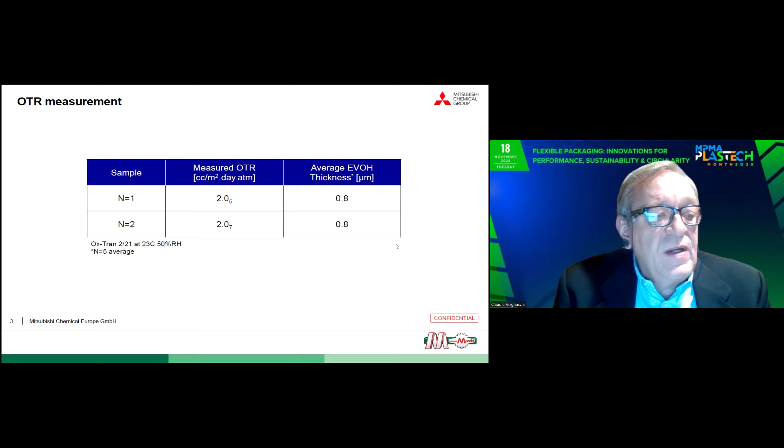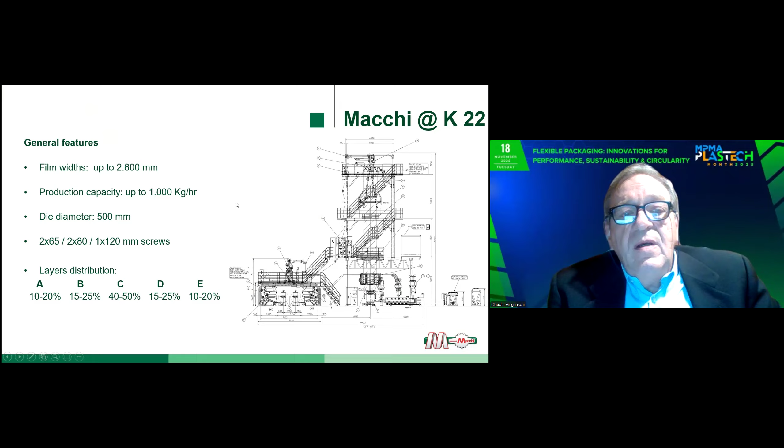In 2022, we presented an evolution of our traditional POD, polyolefin dedicated line, developed for the use of secondary raw materials - that is to say regenerated or recycled raw material. All along the K22, we were running constantly 800 kg per hour of film with an overall total percentage of PCR up to 35%.

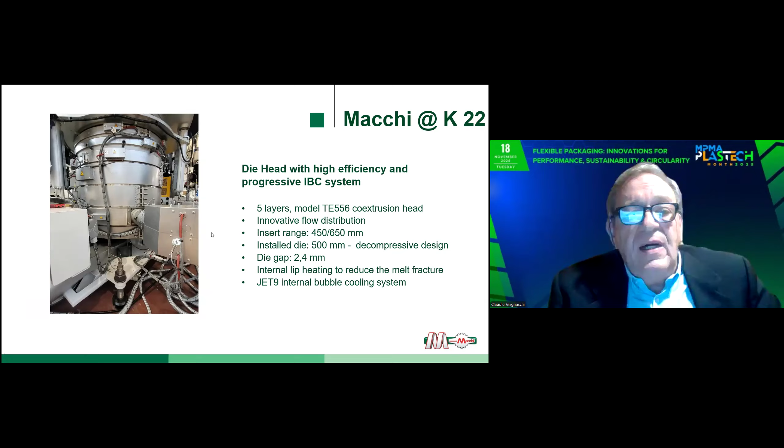This was achieved by using hydraulic filter changers in order to change the screens without stopping the line, a newly designed die head able to process and homogenize the PCR perfectly, and a range of screw profiles optimized for the processing of PCR resins.

But again, this was just another step. Everything started with the POD concept. The POD concept was targeted to allow converters to reduce the quantity of resin and therefore the energy necessary, to allow for the reuse of PCR, and to allow for easier recyclability of the material. A POD line, a polyolefin dedicated line, is a 5-layer line designed to run polyethylene structures and to manufacture at high capacity better, thinner, stronger, and cheaper flexible packaging film.

So the 5-layer POD system is a development of the 3-layer, and it allows use of specific new resins in well-defined layers in order to achieve the best optical, sealing, and stiffness results.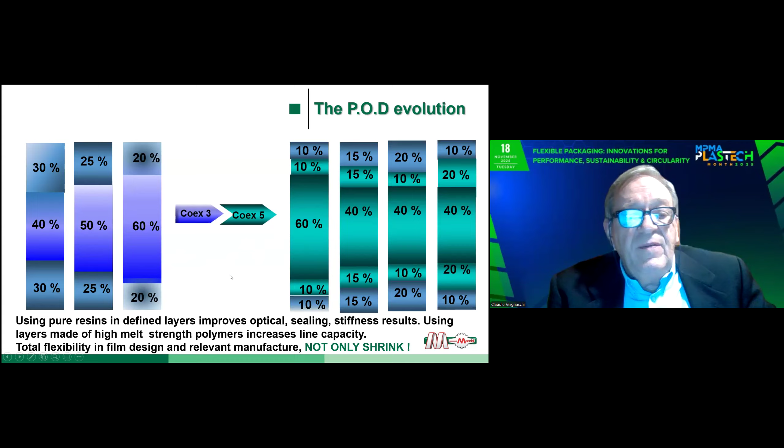Main benefit is down gauging. What does down gauging mean? First of all, more product packed for the same quantity of raw materials, so your overall cost is reduced. You save in additive cost, and you need less energy for transport and for converting, and altogether you have a lower carbon footprint.

Talking about sustainability, the example is based on collation shrink, because this was the first driver for this development. 20% film down gauging means 25% more product packed with the same quantity of resin. But it also means 20% fewer trucks needed to transport film to plants, and lower CO2 emissions due to higher pack yield per kilogram of polymer.

And once you go on the shrinking machine, you need much lower energy. Thinner film means faster shrink at a lower temperature.

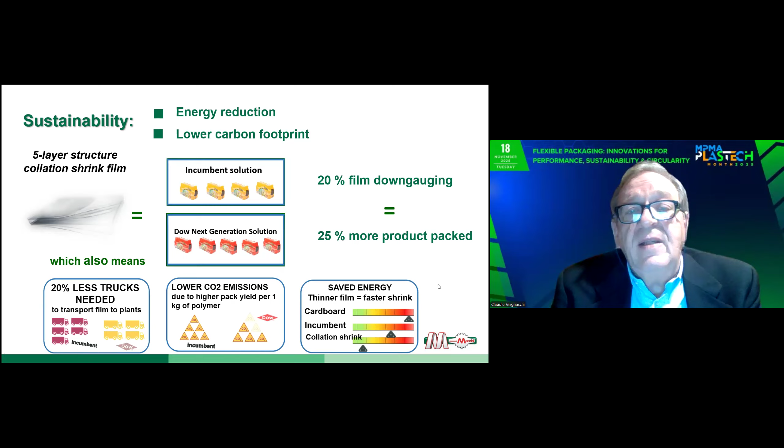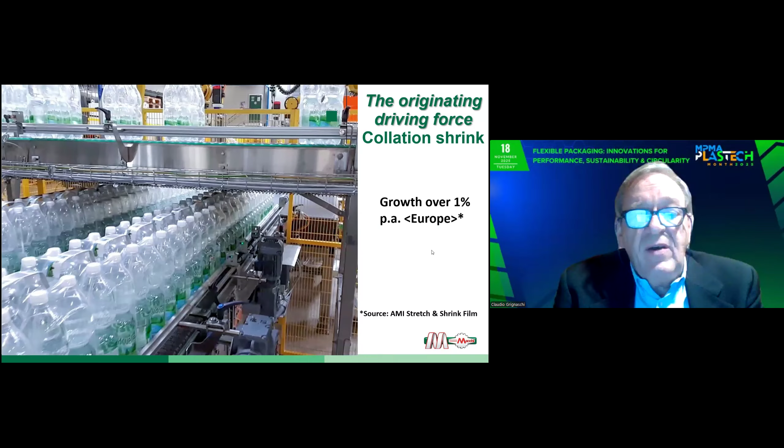As I said, the original driving force for development of the POD technology was collation shrink. Collation shrink is a European market amounting to some 1 million tons per year, and each saving in this market is meaningful.

Other hits can be flexible packaging, stand-up pouches. As I said, with our 7-layer barrier monomaterial technology, you can have monomaterial laminated pouches. Frozen food is also a field of application for the 5-layer POD film.

Diaper compression packaging - this is a study carried out by ExxonMobil, and as you can see, you have a decrease of 20% in thickness, from 50 to 40 micron.

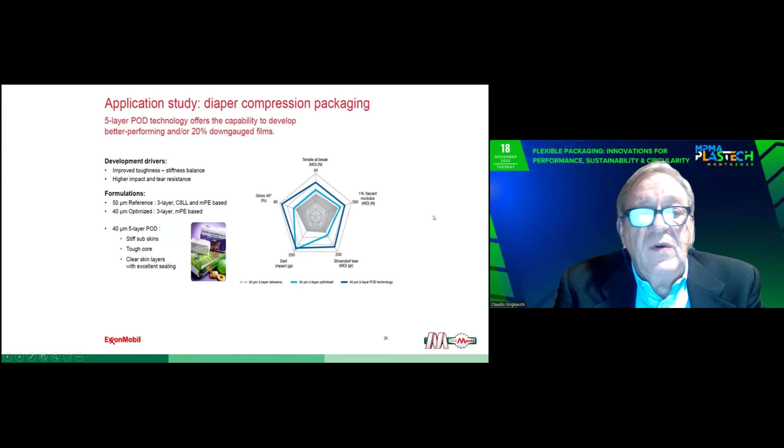Pallet stretch hood, for instance - it allows you to decrease your stretch hood thickness from 100 micron to 80 micron, with the same elongation characteristics and a better holding force.

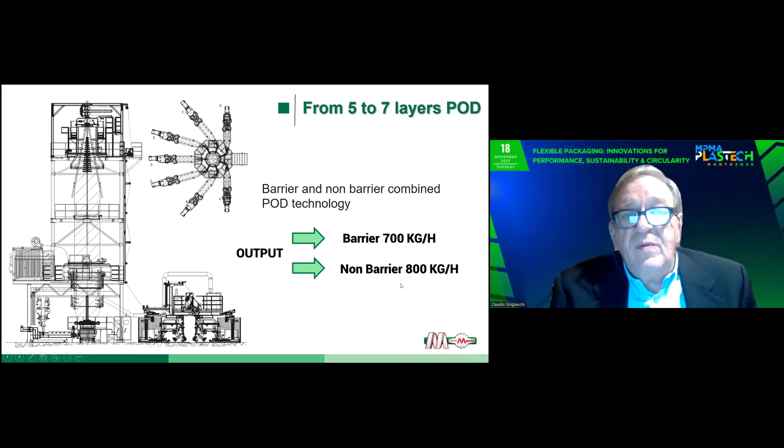Next step, back in 2019, was to develop the 5-layer POD concept to 7-layer, combining barrier and non-barrier with very high output rates. This allows further down gauging possibilities, so less raw material, less energy, lower carbon footprint, easier recyclability, using compatibilizers if needed, and new film design ready to comply with the coming PCR usage regulations in Europe and Western countries.

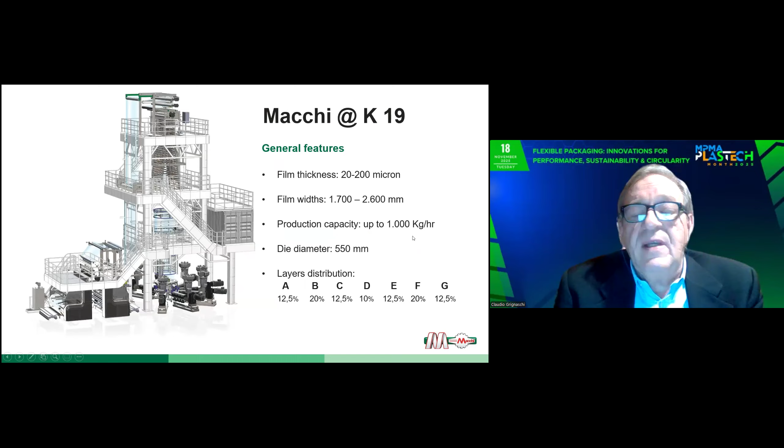This was our key solution at K 2019: a 7-layer line, 2.6 meter wide, 1000 kg per hour maximum productivity.

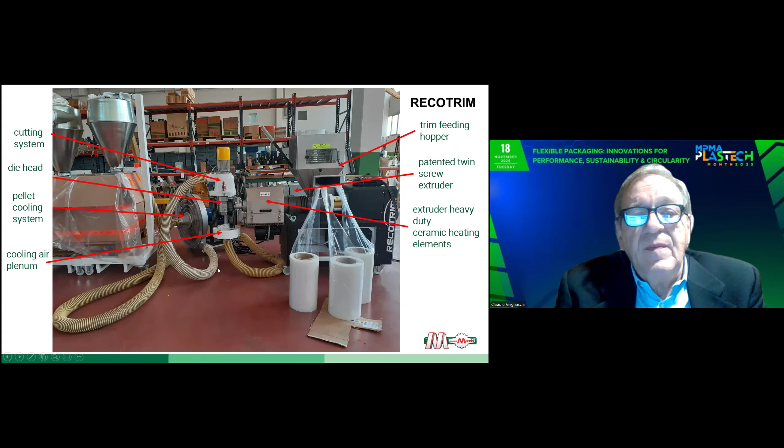As you can see, it's a very compact machine. Movable, mounted on wheels, only air-cooled, patented twin-screw extruder for easier feeding of the trims and waste rolls to the extrusion zone. Strand die head with cutting system, integrated pellet cooling. Here you can see a particular of the twin-screw extruder, which allows it to pull the trims into the extruder constantly, independently of the feeding speed.

Blade cutting on top of the strand die. By adjusting the rotation speed of the blades, the size of the pellet can be adjusted easily.

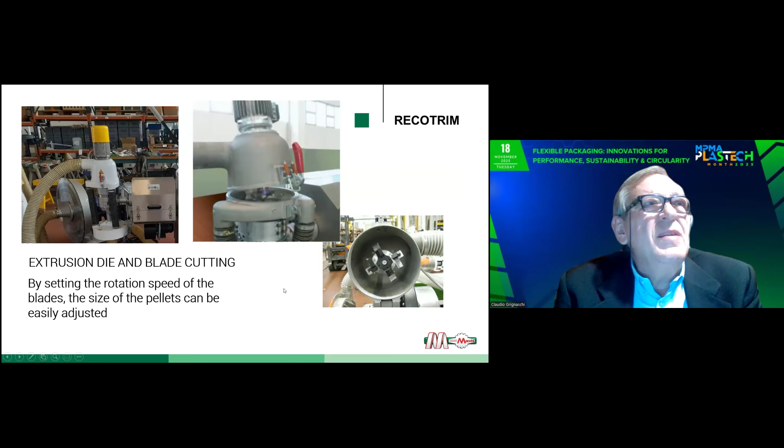And this is what you get: very clean, high quality, uniform pellets with no granulometric variation, and no variation of the melt index after extrusion. So you can reuse the pellets immediately without any contamination and refeed them in the central layer of your extrusion line.

It is a very compact machine, as you can see, and can be moved anywhere. Altogether it takes less than 6 meters of space, so the footprint is very, very limited. The line is equipped with a heat exchanger in order to provide cooler air to guarantee maximum productivity to the die and to the system itself.